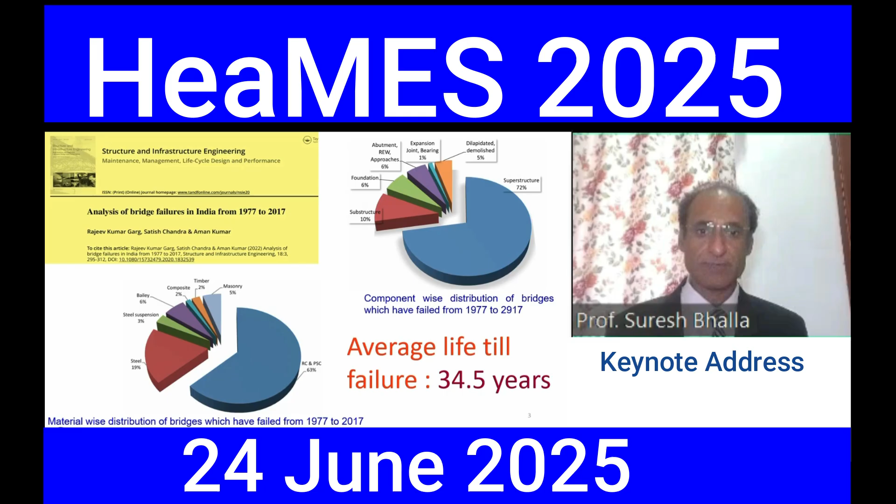So every now and then we see failures happening in India. And if we talk of the year 2024, it was quite a bad year. At least 15 bridges collapsed on our national highways, 11 collapsed while under construction, and 4 collapsed under operation. So what is the reason for this kind of localized happening? Because at least 12 of these happened in the state of Bihar alone.

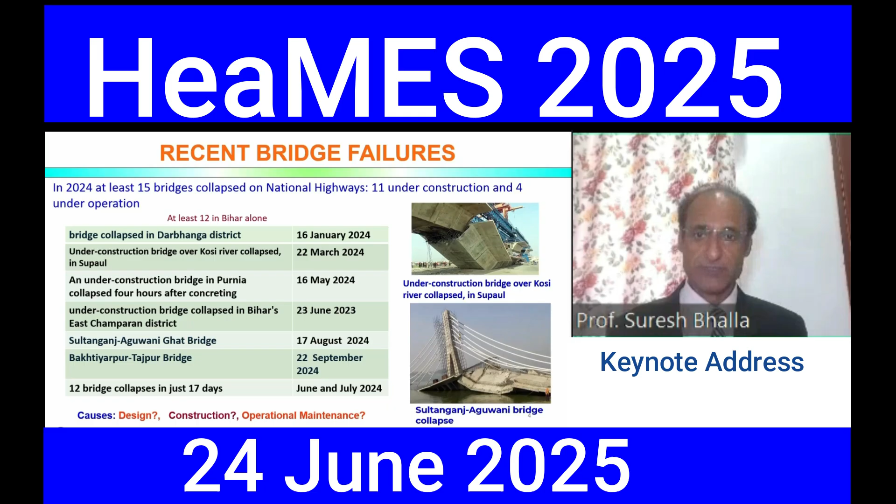Whether it's a design issue or construction standards, or in the case of the running operational bridges, is it an operational maintenance problem? Many of these things in our country are not very transparently discussed, and often these things are generally buried. So that is the situation I am talking about.

So here are the typical issues with developing nations, India in particular. We face the problems of bureaucracy here. In general, among the government bodies, government officials, and even the engineers, the understanding of structural health monitoring is very poor. The accountability is often not a pinpointed one; it's very difficult to pinpoint the accountability. Then there is a high reluctance to update skills and adopt new technologies.

If there is decision making, it's abruptly taken at the higher level without participation of the ground engineers and personnel who are actually involved in the process of maintenance. Then even if it's decided to implement SHM, the approach is half-hearted. That is, there is always inconsistency in implementing the SHM solutions.

So here there are misconceptions. Misconception number one is that it's thought by authorities that our infrastructure is new, our building is new, so it does not require any structural health monitoring. So we can just take it for granted.

However, even if the structure is new, it's very important that we perform tests and some basic instrumentation on the infrastructure, whether it's a building or bridge, so that we can map the parameters of the building and the bridge, and we can correlate with the design parameters. So that's why baseline is very important.

Once we have the baseline, we can always make decisions about what's happening in the building. If the stiffness and if the building is undergoing any loss, any structural loss, we'll be able to correlate very well. But if we don't have the baseline measurements, then after 10 years something happens, we are in dark. We are not able to tell related to the original making of the structure.

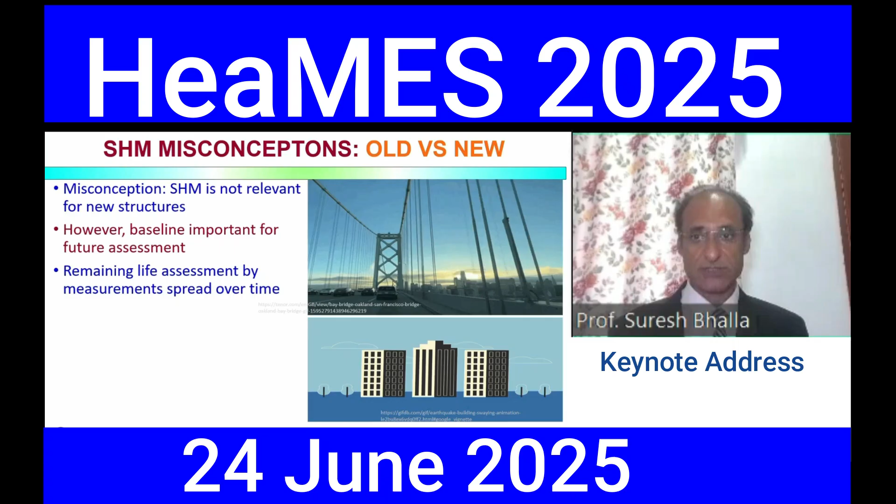So here the problem is that the authorities, they wake up very late when there are visible signs, and when there are visible signs, often they find an alibi, and that is they shoot out a letter for structure audit. So here in India, structure audit is the buzzword. They think this is something which can solve their problems. They have no idea about structural health monitoring, how it's different from audit, and what additional information or greater information structural health monitoring can bring.

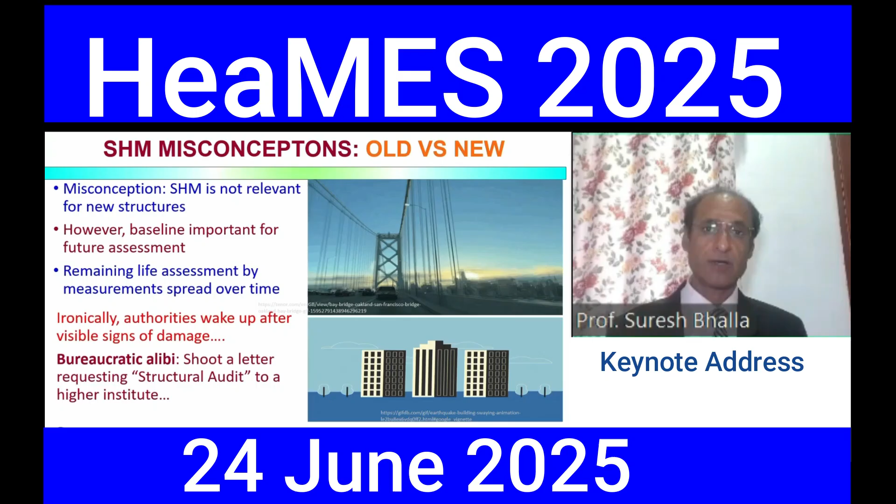So this alibi works often because the authorities, they find something happening, some media coverage, they immediately shoot out a letter, and then they get excused that we have written to this and this higher authority, higher educational body, and it's up to them. We are waiting for response. So that's the normal way the things happen here.

So thing is that the economy is growing, and our union budget has earmarked over 140 billion US dollars for infrastructure. So this is only the government budget. Now there are the private players also who are also doing infrastructure projects, private bodies. So we can now understand the accelerated manner in which the infrastructure sector is booming in India.

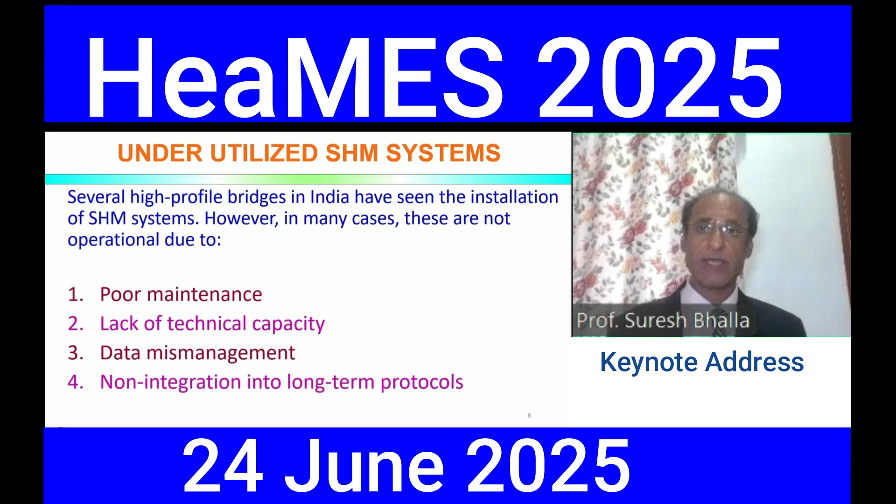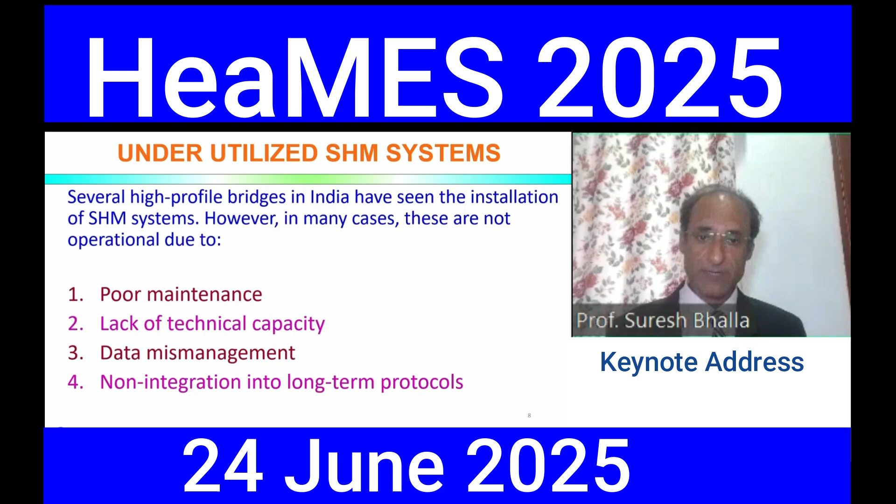Now, to ensure longevity, uninterrupted performance, minimal downtime, and resilience, it's very important that these must be monitored by using the advanced SHM technologies. So here another irony is that the government and the bodies, they often install SHM systems, and there is no dearth of such systems which have been installed, but they are just lying as they are, not utilized. They are not able to give the desired results, either due to poor maintenance, lack of any technical capacity, mismanagement, or the things have been installed, they have been handed over, but the authorities, their technical team, they have not learned and they have not integrated them in their long-term protocols.

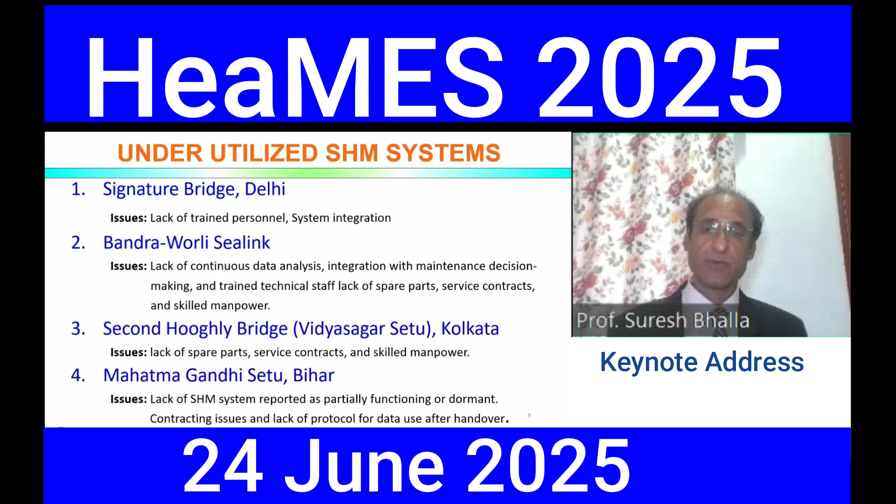So if we just do a survey, we find a number of such structures in India where the SHM systems have been installed, but they are not being utilized, either due to lack of trained personnel, or lack of integration, or lack of skilled manpower, or lack of spare parts, or lack of any proper service contracts. So there is no dearth of such projects where huge amounts of money have been invested in SHM systems, but they have not been utilized.

So here, as part of our Smart Structures and Dynamics Lab and the Indian Structural Health Monitoring Society, our motive is to educate and inform the stakeholders that structural health monitoring is not a rocket science, and we can have simple solutions which are pragmatic in nature.

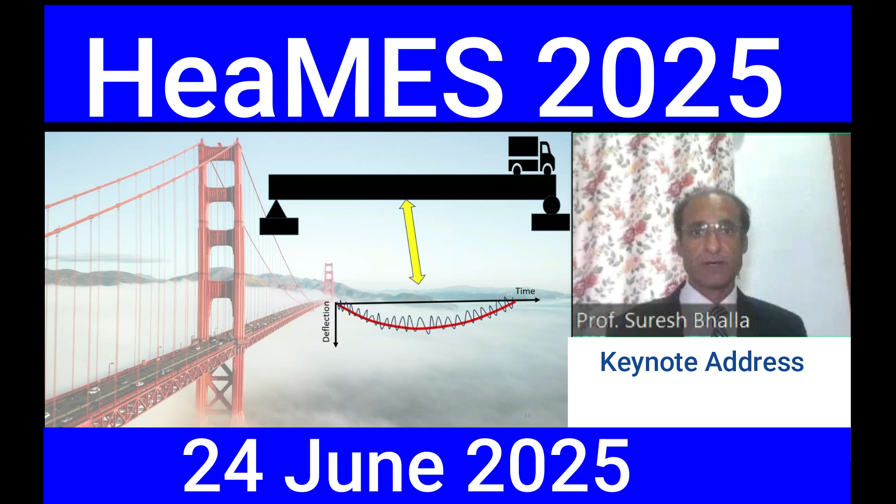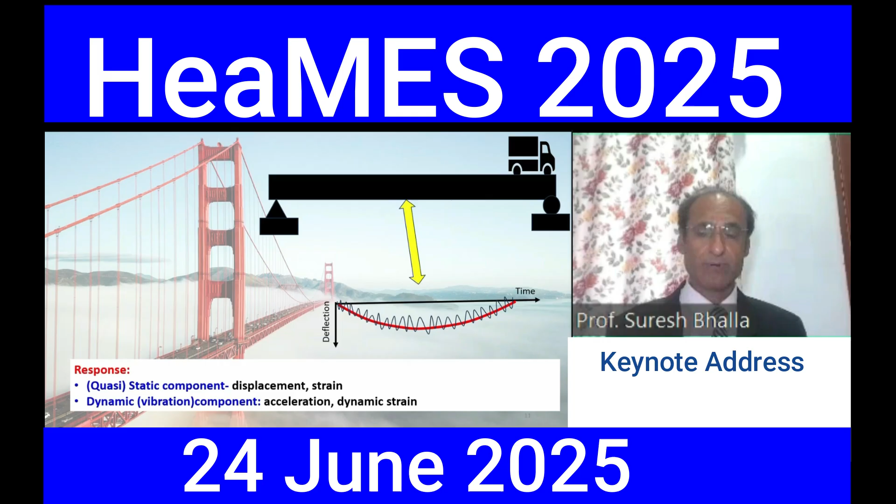So when we talk of monitoring, whether it's a bridge or a building structure, typically we need to monitor the static response, and we have to monitor the dynamic response. Both of them are quite important. Static response could be in form of displacement, in form of strain, and the dynamic response could be in the form of, say, acceleration. So my personal learning from the different projects is that strain, whether it is a static strain or dynamic strain, offers a very simple parameter from where we can extract the features necessary for taking decisions about the condition of the structure.

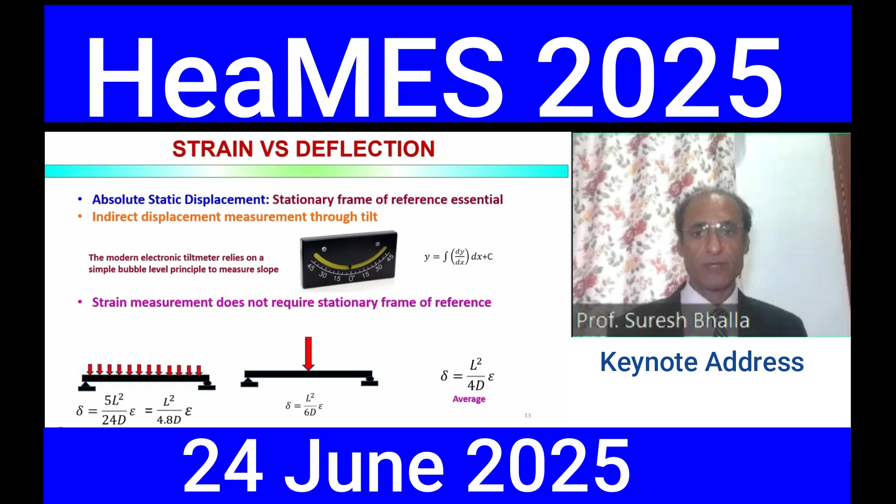So when we say strain versus deflection, it's always the strain which has an edge, because absolute displacement in real life scenarios cannot be measured. So we have to either rely on tilt measurement, but better than tilt is of course strain measurement, because if we have the strain measurement, we can always correlate it with deflection also, and this is something we utilize as a very simple way for obtaining the operational performance check, and also for long-term stiffness assessment by dynamic measurements.

So here for dynamic measurements, we have proposed piezo sensors as an effective replacement for accelerometers, which are very expensive gadgets for developing countries, and they are also fragile in nature. So with piezo sensors, we have shown through practical examples that it's possible to carry out operational modal analysis and obtain sufficient data which can be correlated with the stiffness of the structure.

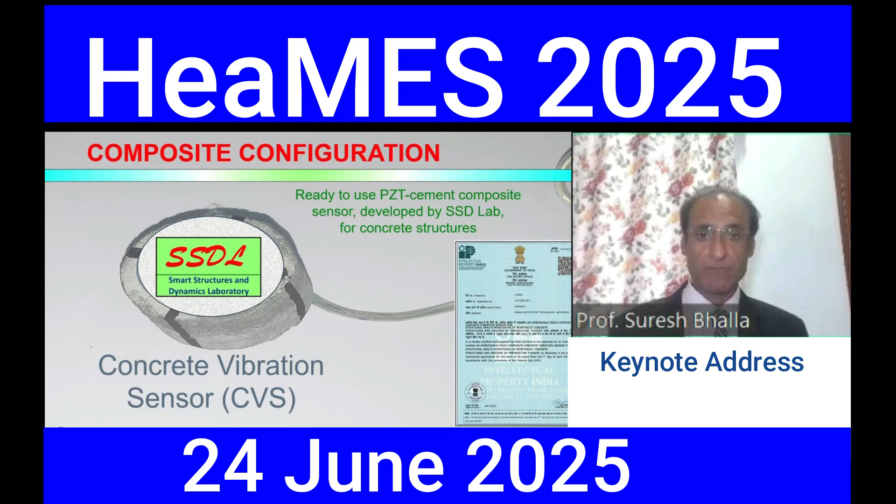So here I would just like to bring to your notice, this is a special concrete vibration sensor, a composite piezo cement transducer, which can be inserted in the structure at the time of the construction, or it can be installed after the structure while it's under use, and this can be very well employed to obtain the dynamic response of the structure, especially concrete structures. So it has very good performance, very good signal to noise ratio if we compare with accelerometer, but the cost is quite minuscule as compared to accelerometers, and we use it very well.

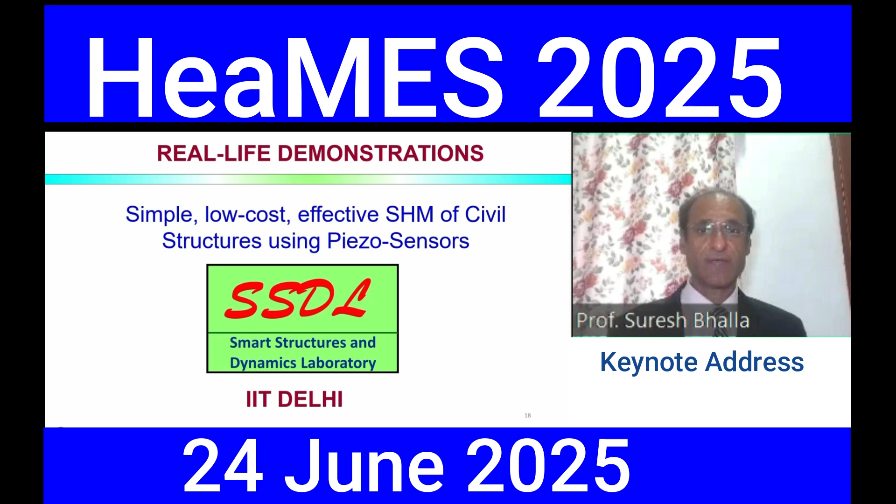So here, when it's the first level diagnosis, we use the static strain, but for deeper feature extraction, we must do modal or stiffness related parameter checks, and for that purpose also we can use either piezo sensors or similar gadgets. So here in this particular bridge, we used the accelerometers, and using the data from the accelerometers, we came to know that the apparently distressed span, its stiffness is just 65% of the apparently good condition span. So this helped in taking a proper decision.

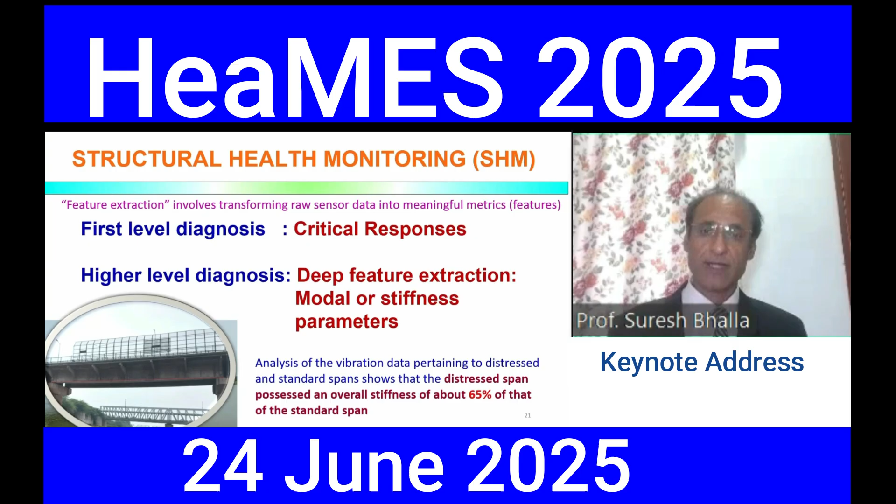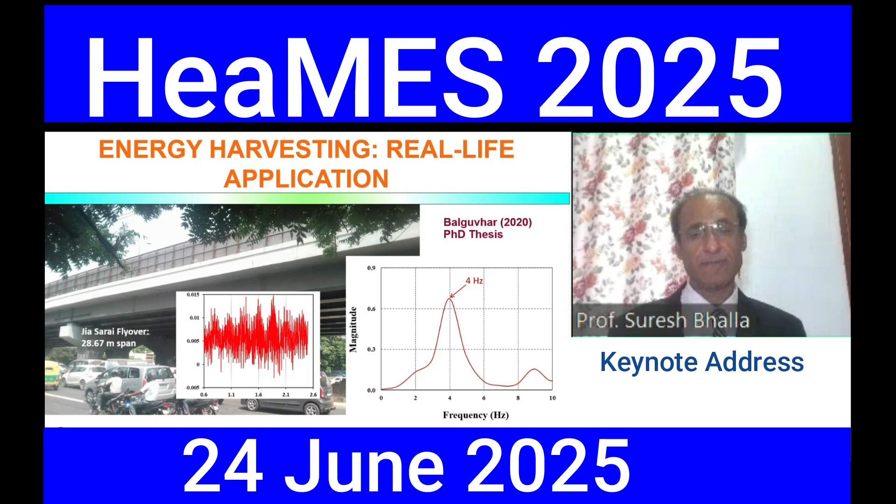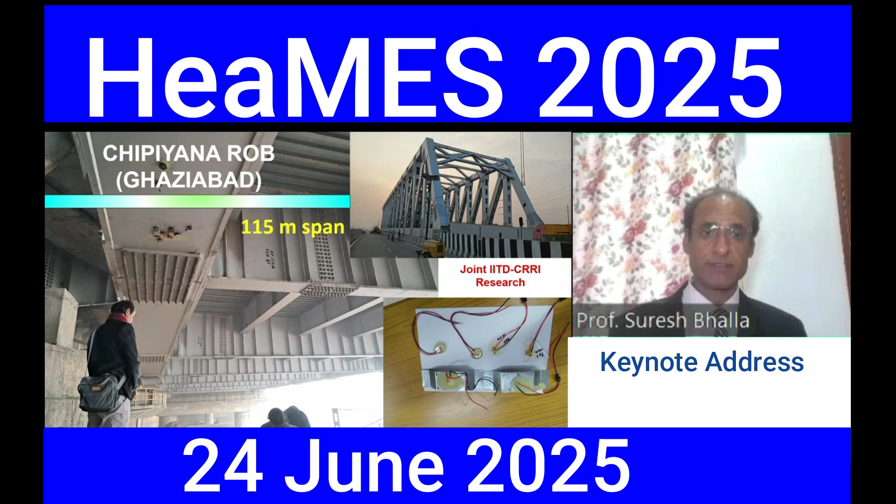And here this is a joint study done by IIT Delhi and Central Road Research Institute in this 115-meter steel bridge. So here we installed piezo sensors, including some novel design. You can see here, this is a novel design which gives us amplified strains, so it can capture very low strains also, which get amplified. And just under the running traffic, we measured the dynamic strain response, and we could very easily correlate it with the modes of the structure.

So I teach the subject of structural health monitoring, and in 2024 I took my class for some basic measurements in this same bridge. And in 2025 we came with a more ambitious target: let's obtain the first mode shape of the main girder. So we can see here, these are the piezo sensors which are bonded on the side face of the main girder near the top, and this is how they look. By inserting our hand, we bonded them one day before, and this is the 1-minute video clip which shows how we carried out the measurement of the baseline mode shape of the bridge.

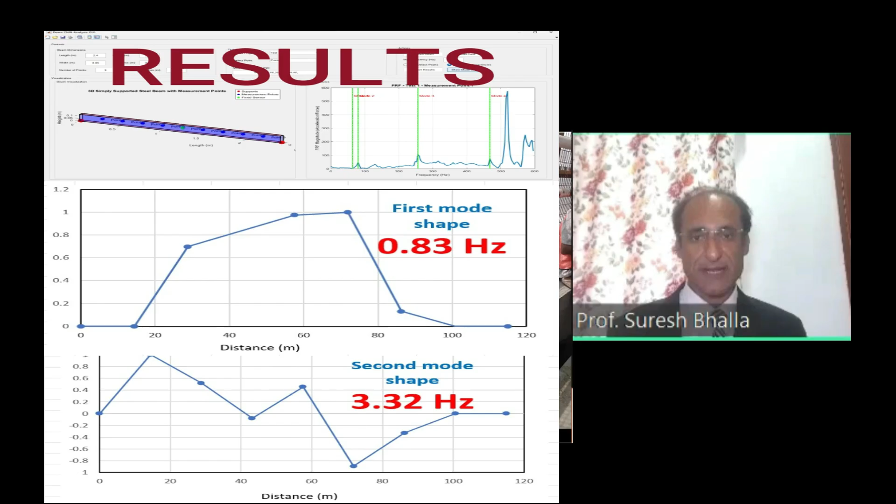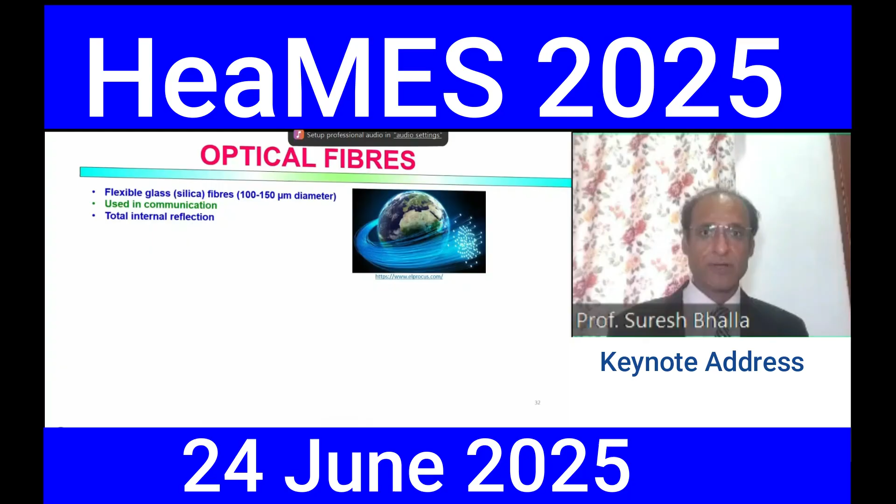So basically now, other candidate technologies which could be useful in the Indian context or for the developing countries are the optical fibers, especially the FBG or fiber Bragg grating sensors, where they use the principle of gratings, which act basically as filters. They filter out a particular frequency, and most of the other light is transmitted, and this serves as the measurement of the corresponding strain coming on the structure. This particular frequency is the Bragg wavelength.

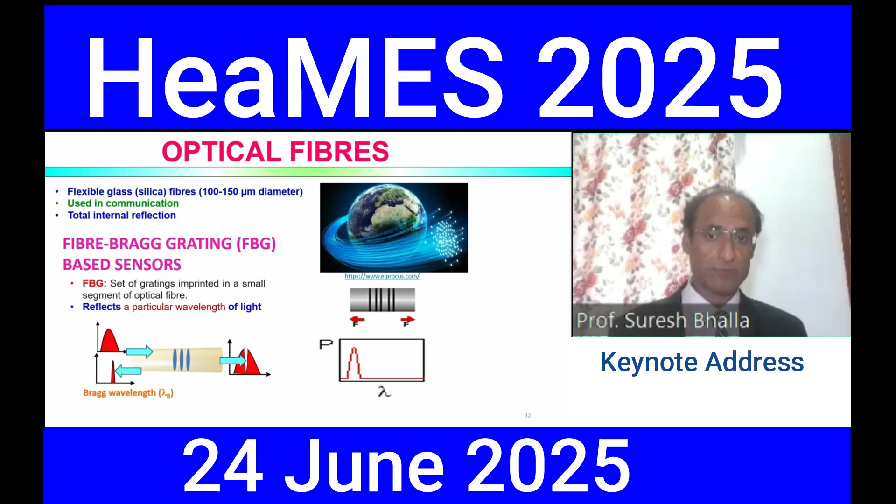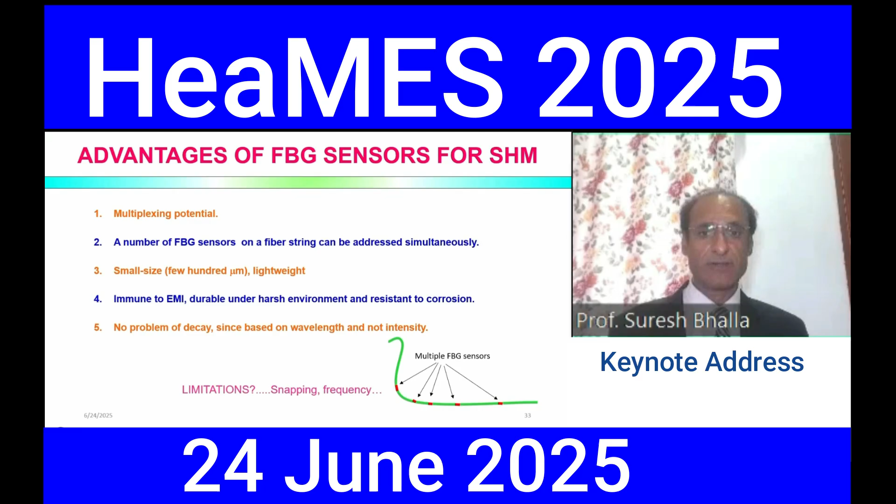This is a very promising technology because it has multiplexing potential, it has small size, the sensors are non-reactive, it's immune to electromagnetic interference, and there is no problem of decay because our measurements are based on wavelength and not intensity. And now there are solutions; very good high quality FBG sensors are there which do not get snapped easily.

Another technique which has very good potential is the vision based technique. Either we use a drone with a camera as an artificial eye, which is favorable for AI integration. At least we can map the surface defects. We may not be able to pinpoint the actual stiffness or the residual condition of the structure, but at least the surface defects and the non-accessible portions of the structure we can of course find. And the other is the photogrammetry technique, where we can get the static response or the dynamic response. These also have very good potential in the Indian context.

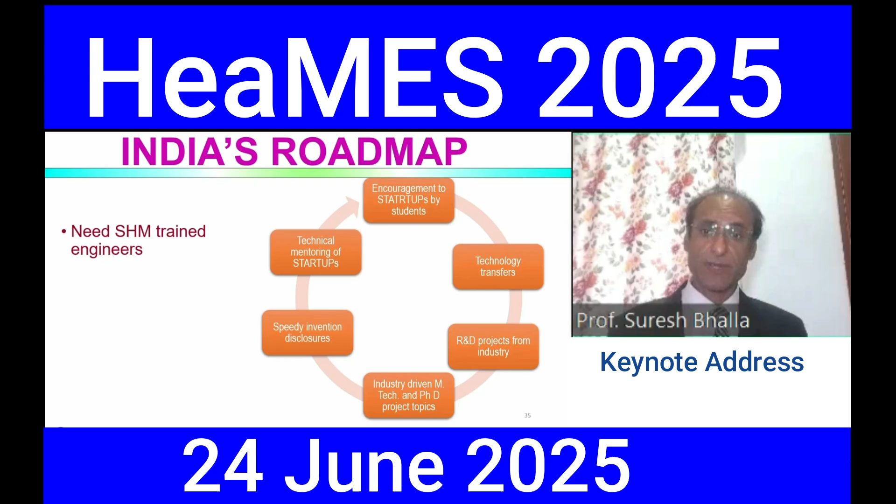So what is required for the developing countries is trained manpower, industry-academic joint research, an ecosystem where different stakeholders can come together, and policy from the government. It is in this direction that we have formed the Indian Structural Health Monitoring Society to propagate the agenda and the importance of structural health monitoring here in South Asia.